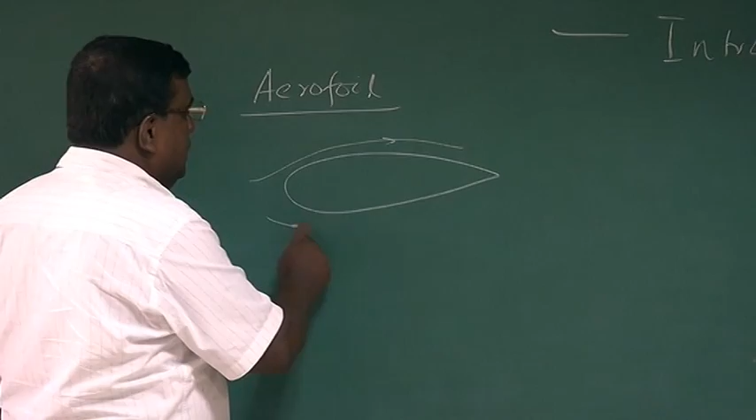If this is the aerofoil, then the contour of the wing and the flow over the wing will be decided by this contour, and there won't be any lateral flow or cross flows, right?

In that we define something called streamline. We didn't define streamline properly before; we want to define it in a more explicit manner now, but without going too much into the details. What actually happens?

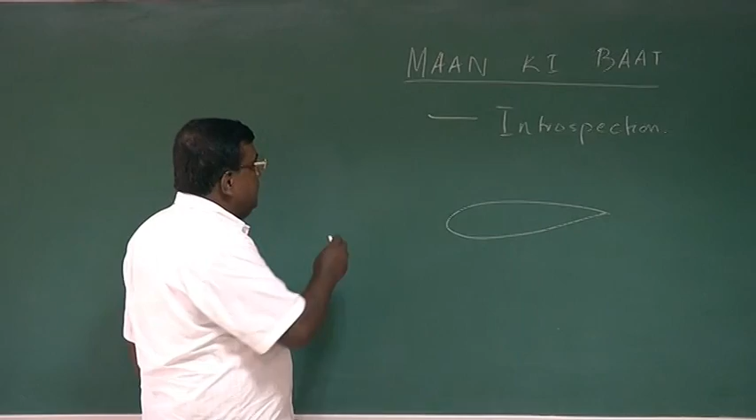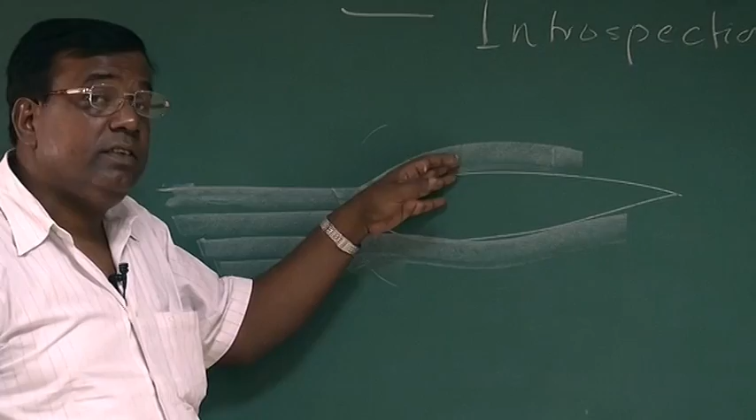Suppose the fluid flow is coming like this. What happens here? Some fluid will go like this, some will go like that. This flow over both these surfaces will decide what is the pressure difference.

Now the question comes, why at all should there be a pressure difference? This question we need to ask. We need to understand a little more, and we will be addressing that part.

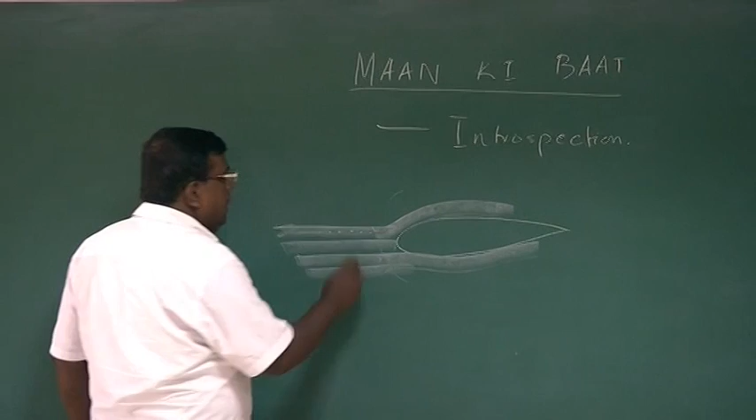First, if I want to represent this flow, which direction the flow is going, one of the ways is to define streamline. What is a streamline? You imagine points in this flow, and if I draw a tangent at this point, that gives me the direction of the flow. So this becomes your streamline, and this is another streamline. Any point you pick, draw a tangent, that gives the direction of the flow.

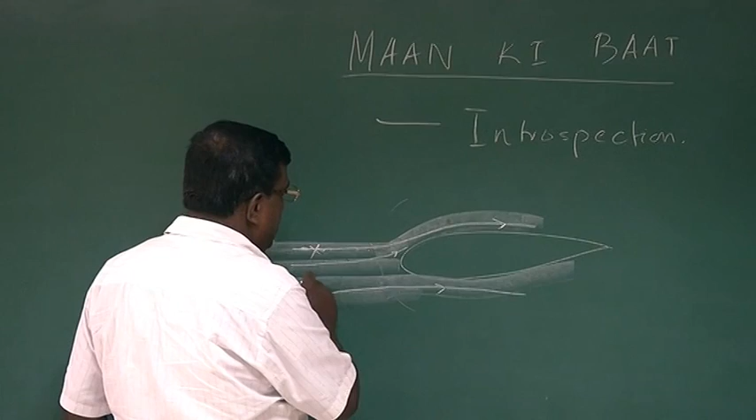It helps in visualizing, it helps in modeling. So many streamlines will be going like this. Infinite streamlines I can draw, because these are fictitious lines. This only helps to understand and represent the direction of flow, nothing more than that.

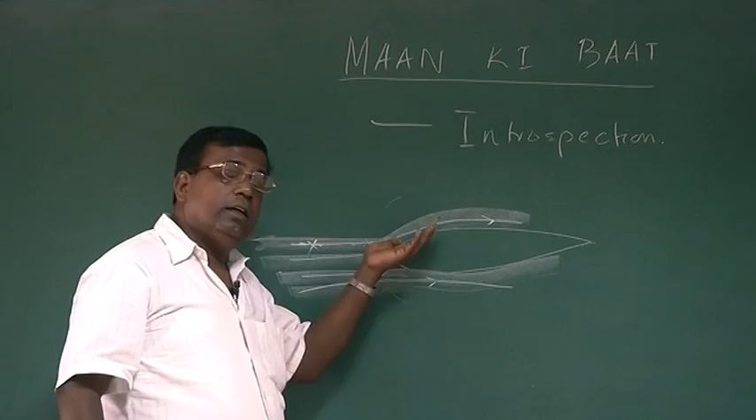However, this concept is what aerodynamicists have used in developing an analytical model to understand the forces, how the forces are acting, and what will be the force behavior with the orientation of the aerofoil, etc.

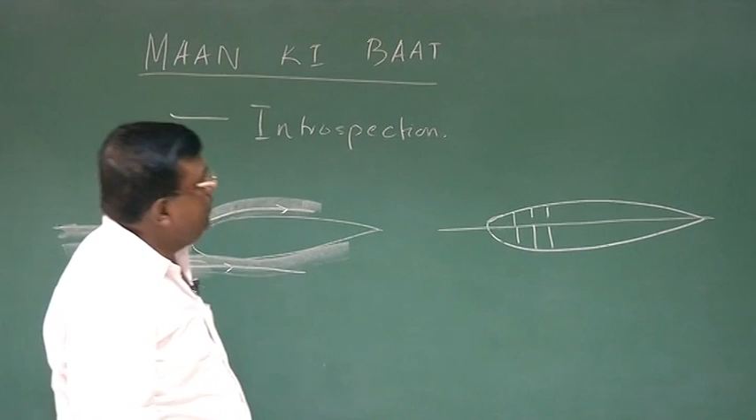Forgetting about streamlines for now, if I draw a symmetric aerofoil, symmetric meaning the distances from the chord line are the same on both sides. Though it isn't drawn properly, I hope you understand by now what a symmetric aerofoil is.

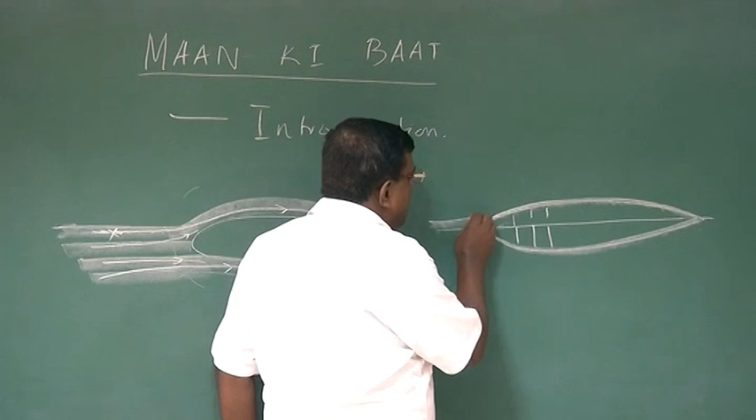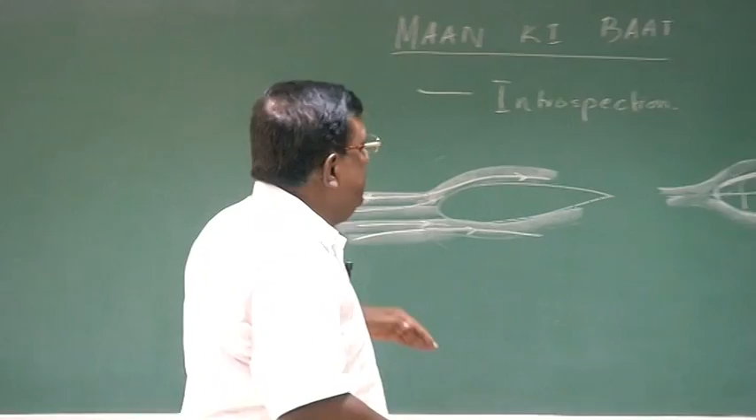What will happen? Without going into aerodynamics or anything specialized, by natural justice you will find half of the flow will go this way and half will go that way, because over a particular line, flow on one side will have a direction like this, and the other part will flow like that. So there will be another line where there won't be any flow in that direction. This part separates the upper and lower flow. I am not using any aerodynamic term here.

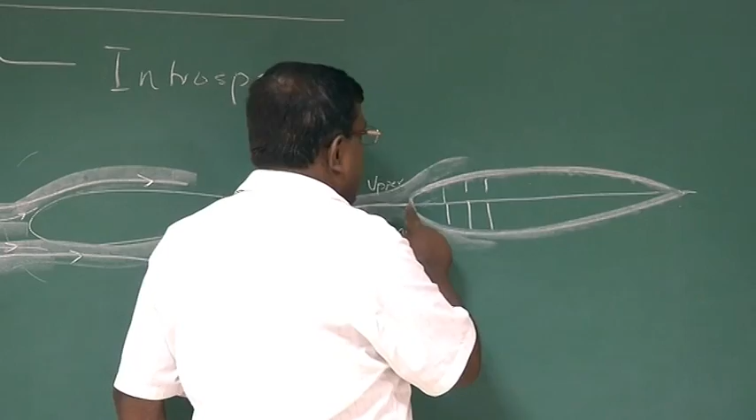So now see one thing. If it is a symmetric aerofoil, that means from here to here and from here to here, if I measure their length, they will be the same.

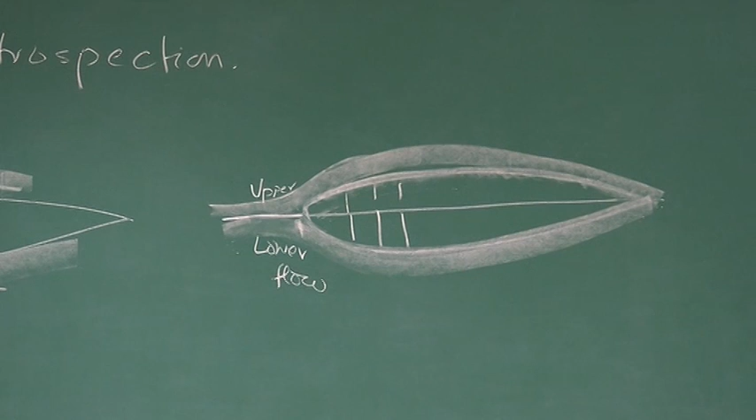That means the flow over this, if it remains attached, will travel from here to here, and flow here will travel from here to here, traveling equal distance. And there is another natural law, that whatever fluid is coming here has to come out. They cannot get stagnated or accumulated at one point, which we call the continuity of fluid particle motion.

That is, if we try to draw a pipe and allow fluid to flow through it, I know that whatever is going in here has to come out.

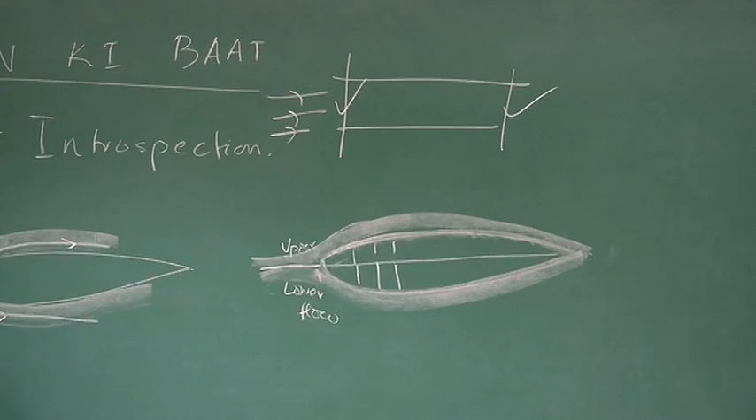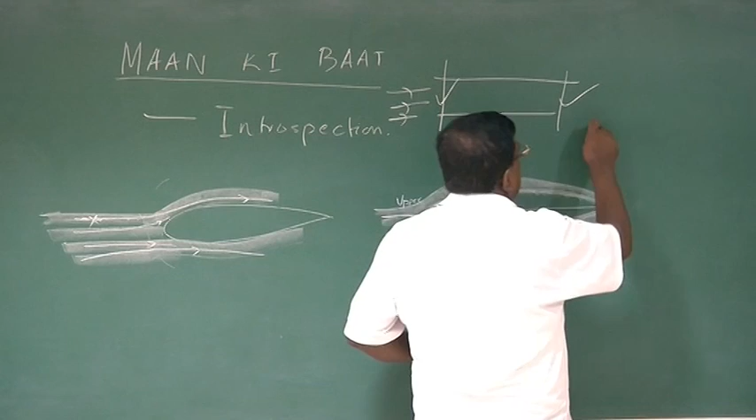If that is true, that means if they are traveling equal distance, upper portion as well as lower portion, they will have the same average velocity. And if the average velocity is the same, that means the pressure here and pressure lower has to be the same, because P plus half rho v square has to be constant, that is Bernoulli's theorem.

And since both are having the same average velocity, the pressure remains the same, so pressure upper and pressure lower will be the same, and hence there won't be any lift. This is one of the explanations.

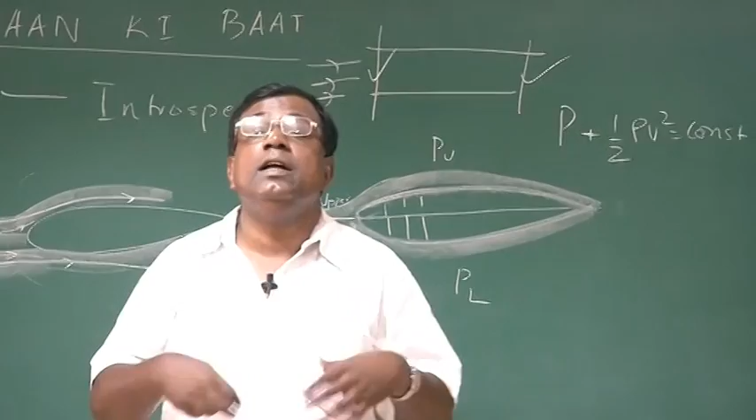There are many explanations, and they are designed and formulated to suit mathematical modeling. You'll see there are many ways of defining this other than what I am explaining here. This is using very fundamental common sense.

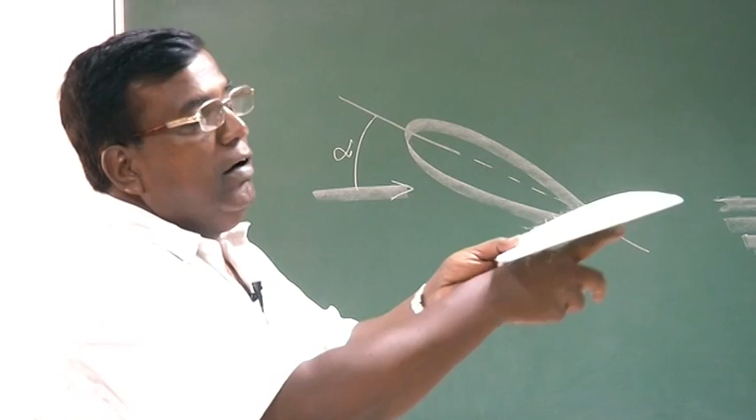Now think of this same symmetric aerofoil at an angle of attack, alpha. Now the question comes, what is angle of attack? To understand, revisit: if this is the plate, and this is the velocity direction, concentrating on the vertical plane, the angle between this velocity vector and the chord of the wing is called the angle of attack.

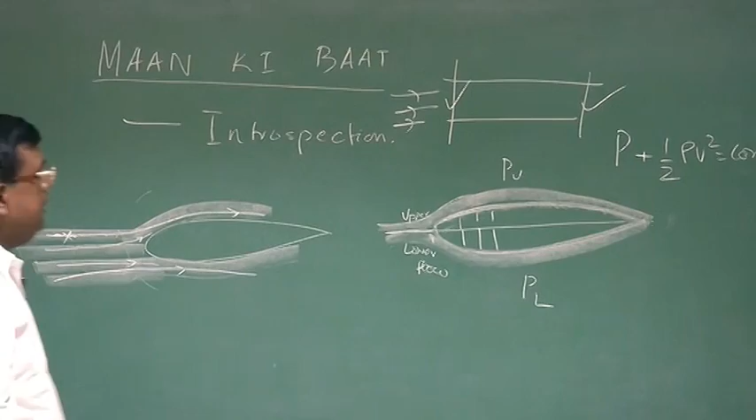Now what happens if I visualize like this? You could see some flow will go like this and some flow will go like this. What is the difference between this picture and the earlier one? You could see that the upper part of this fluid will be traveling more distance than the lower fluid. This is going like this, so it will traverse a larger distance than that fluid particle.

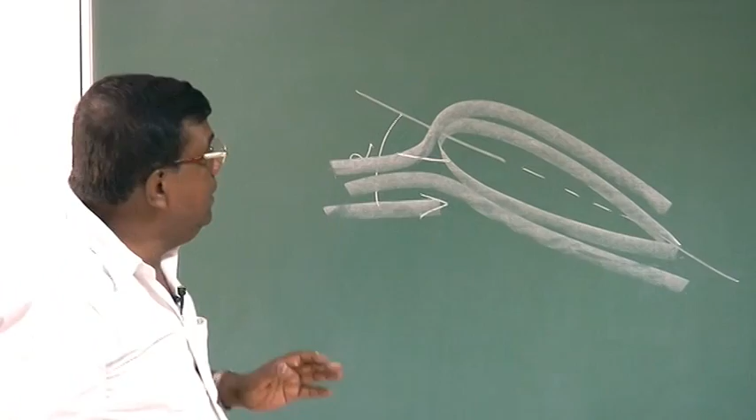However, because of continuity, whatever has entered here has to come out at the same time, that is, all the fluid particles will come out at the same time. That also tells us, since this one has to travel a larger distance, the average velocity here has to be greater than the average velocity lower, or I call it upper.

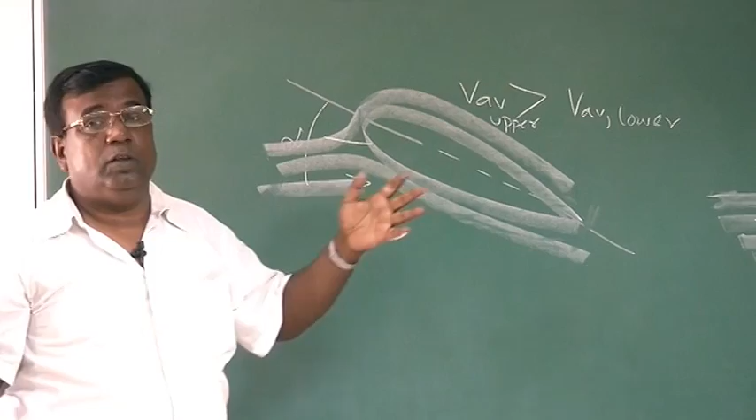Is this clear? If it is at angle of attack, this fluid stream has to traverse a larger distance compared to the lower part of the fluid. However, all the fluid has to come out at the same time. That means the upper part has to hurry up because of the larger distance. As it hurries up, the average velocity of the top surface will be higher compared to the lower surface.

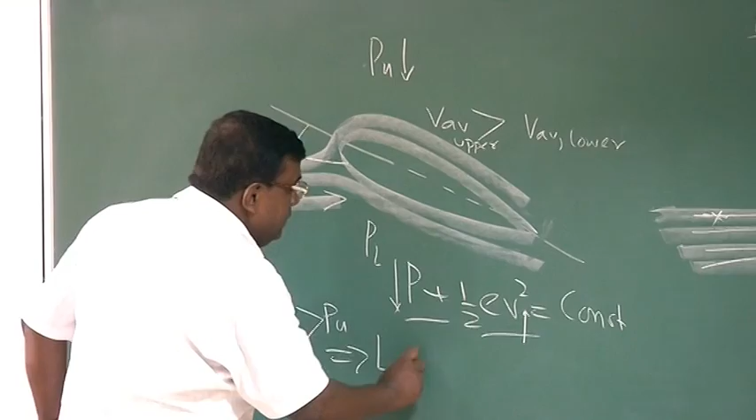And if the upper part speed is higher, and we know P plus half rho v square is constant, that is Bernoulli's theorem, if this term is higher, then the other term has to go down. That is why the pressure upper reduces compared to pressure lower, or pressure lower is greater than pressure upper, so there is lift. Is this clear?

I have purposely avoided technical terms which an aerodynamicist would use. They will define something called the stagnation point, but I am not using those things here.

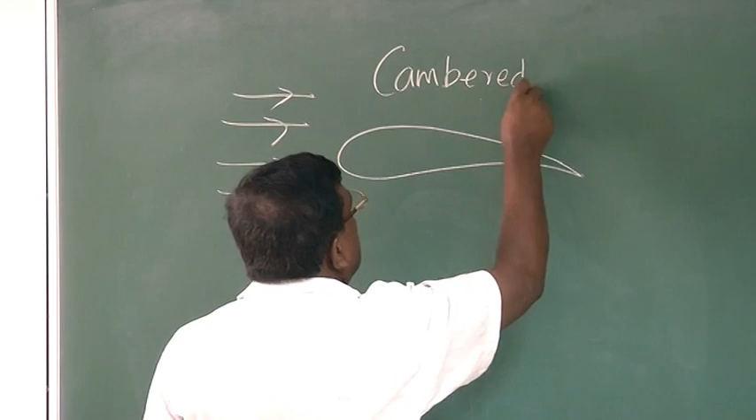Then we were discussing cambered aerofoil, where that symmetry has been broken. Now, from this geometry, if the flow is coming like this, the upper part has to have higher speed compared to the lower part. The same theory applies here, and we will have a pressure difference and lift.

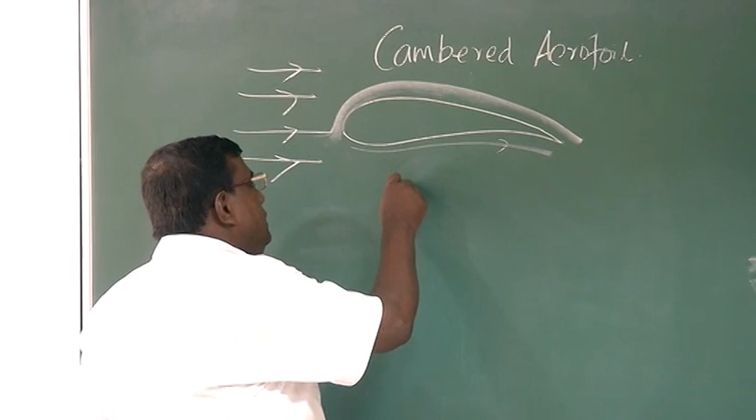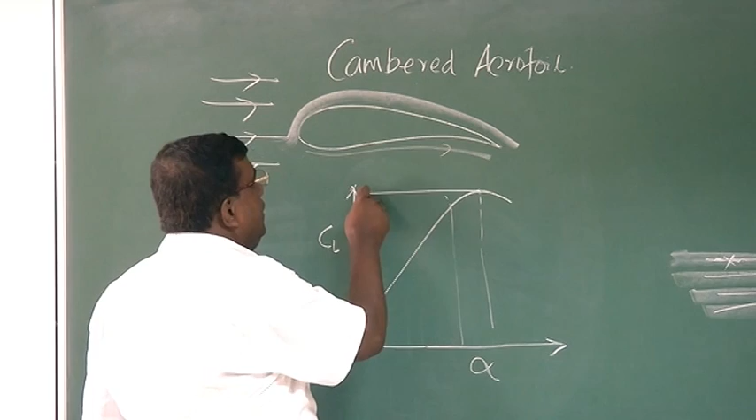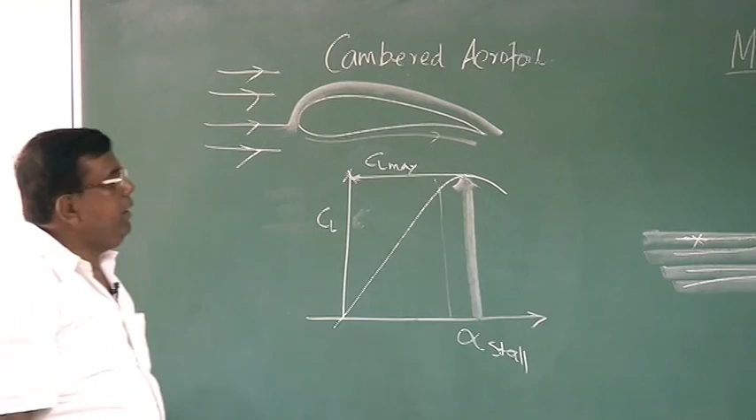We also realize that if I plot CL versus alpha for a cambered aerofoil, up to a certain point it is linear, and after that we reach what we call CL max, the maximum CL this wing or aerofoil can generate. After that there is a drop in CL and an increase in drag, and that region we call stall. Conventionally, we call the angle at which the flow separates alpha stall. So these two important terms: at alpha stall, CL is CL maximum, meaning if you further increase the angle of attack beyond alpha stall, you will not get additional CL—in fact, CL will reduce.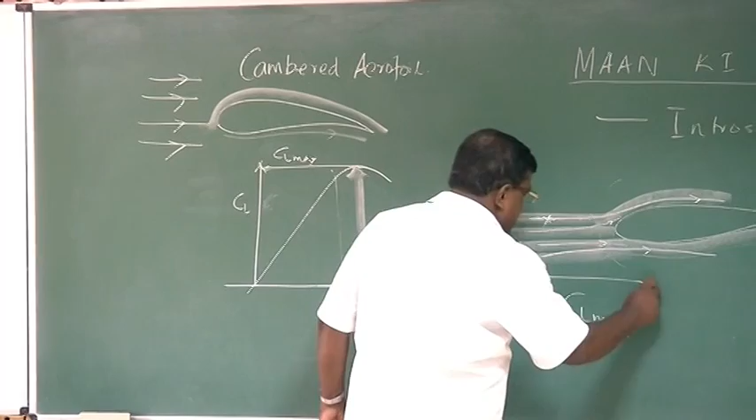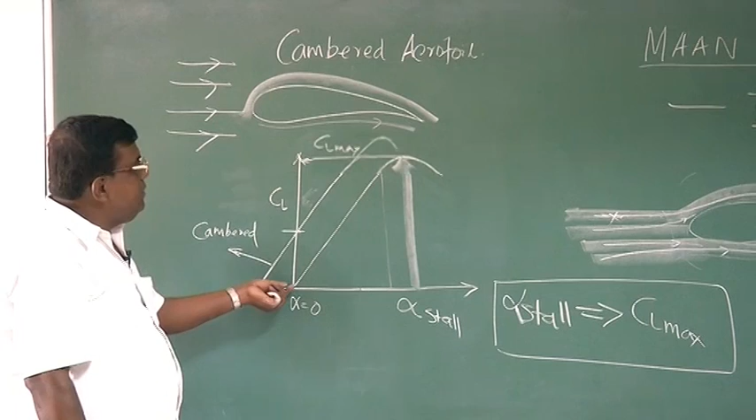This is additional understanding we should have. For a cambered aerofoil, you'll find this graph is no longer like the symmetric one. It looks like this, where I write cambered. At alpha equal to 0, for the symmetric case CL was 0, but for cambered there is a positive value, which is denoted CL naught. And if I extrapolate this curve, I find the alpha for CL equal to 0 is negative.

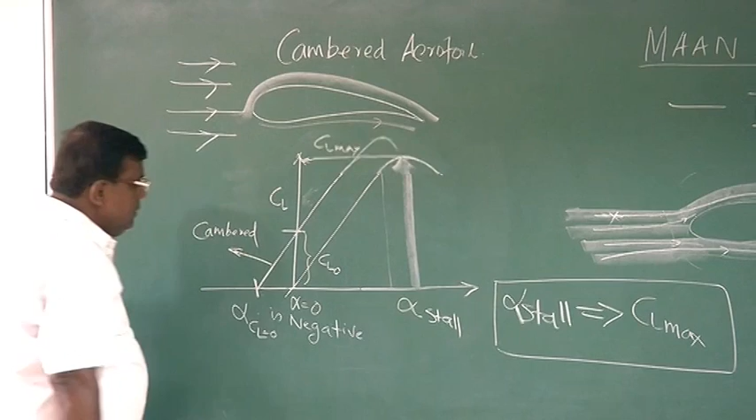You could see here, if I am flying at this alpha, then the CL is 0 and this alpha is negative, right? This is very important. It is also denoted as alpha zero L. Many textbooks you will find like that.

For a cambered aerofoil, I get larger CL at smaller geometric angle of attack, but at the cost of what? The alpha stall reduces. So although we are getting more CL, the alpha stall will reduce. If this is a cambered aerofoil and this is alpha for CL equal to 0, which is negative...

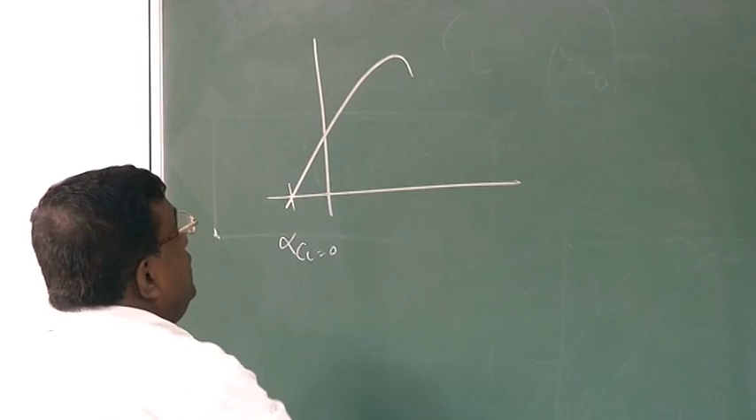If I draw a cambered aerofoil, I know there is a zero lift line, that is called the zero lift line. That means if the flow comes like this, at a negative angle of attack, corresponding to this alpha CL, then there won't be any CL generated by the cambered aerofoil.

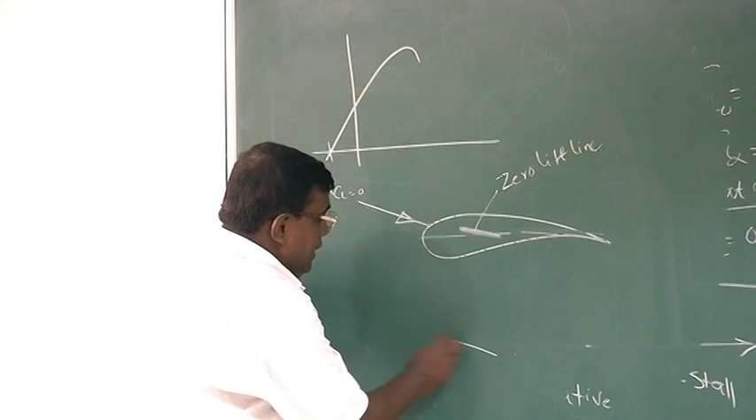In flight mechanics, we use this concept more frequently when discussing stability and control. I repeat, this is a negative angle of attack, because positive angle of attack is when the flow is coming like this. When I draw like this, it's relative here — the airplane is actually going like this. But negative will be in the reverse direction, that is why this is negative angle of attack.

So this was what we discussed, or we create a foundation. I'm trying to add a little more insight into it so that our next lectures become very smooth. After this, from aerofoil, then we try to talk about wing, and we talk about finite wing.

Talk about finite wing, and we realize finite wing means this span is not infinite, it is finite. So at the tip of the wing, because there is a pressure difference in the bottom and the top, there will be vortices, and they will draw kinetic energy, rotational kinetic energy, at the cost of the machine's energy. So there is a drag, and we call it vortex drag.

So if I draw it like this, something like this, this is vortex drag. It is also called lift induced drag, or sometimes simply induced drag.

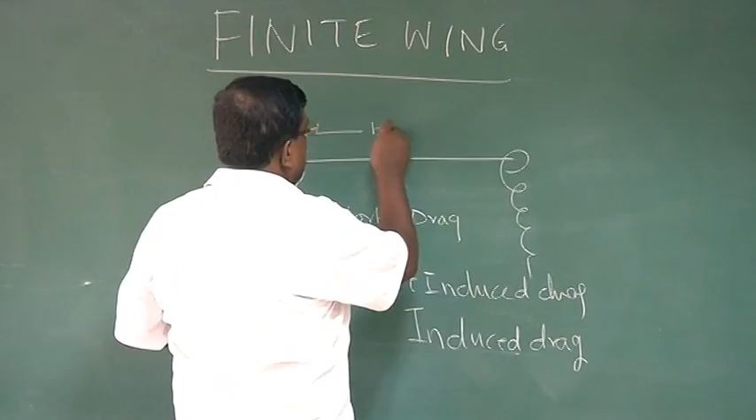And we realize that if this span, which is B, becomes infinity, then this vortex drag will not be there, because there won't be any physical pressure difference. So the vortex drag or induced drag will be 0, and that is like you are approaching towards an aerofoil, which is two-dimensional.

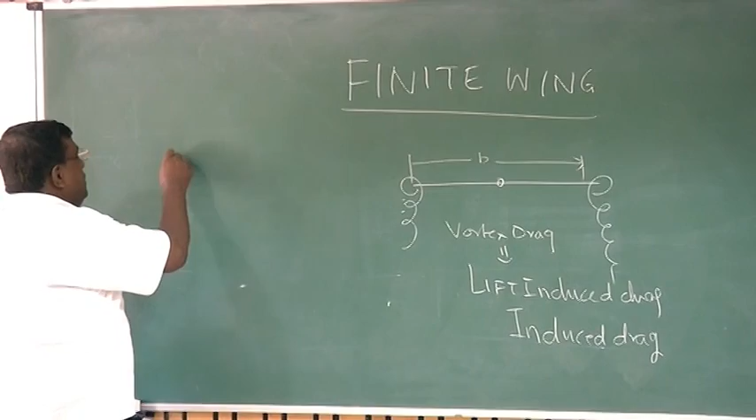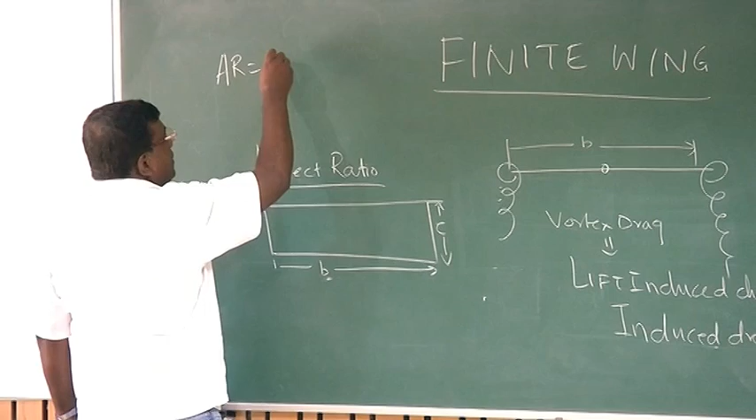And there we define something called aspect ratio. We define aspect ratio as, if this is the span, and if this is the chord, then aspect ratio was defined as B square by area of wing. That is the aspect ratio of the wing. If I want to calculate aspect ratio of the tail, then tail span square by area of the tail. For a rectangular wing, it becomes B by C.

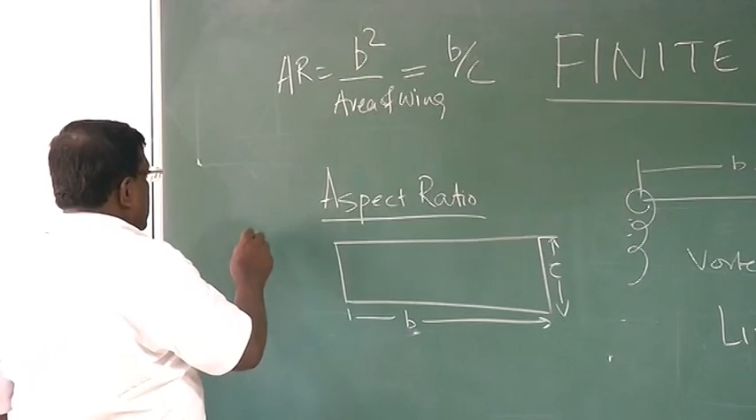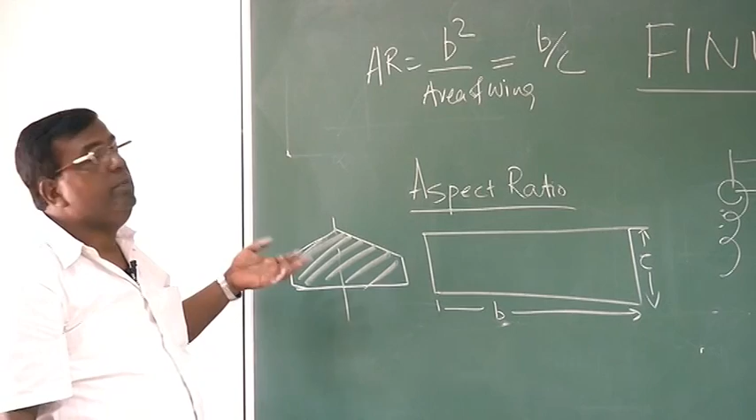However, if the wing is something like this, then actually you have to find out the area of the wing, which will be here, and span square divided by area of the wing will become your aspect ratio. Then it will not be B by C, because C is changing — chord at every point is changing.

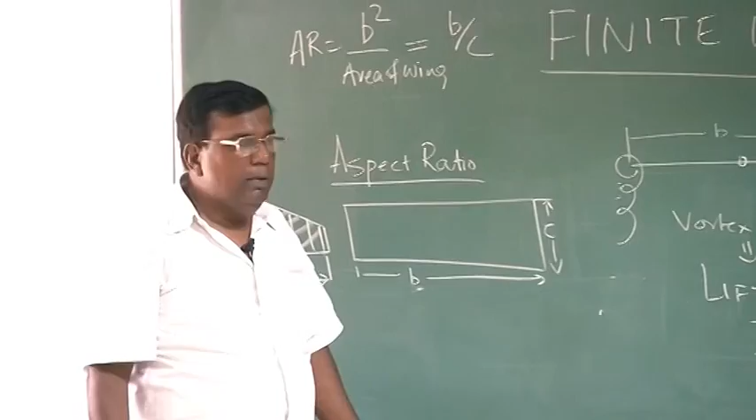While discussing induced drag, we very lightly mentioned something about lift distribution. We talked about elliptic lift distribution where the induced drag will be minimum, and the lift distribution was typically something like this, where there are no pressure differences at the tip.

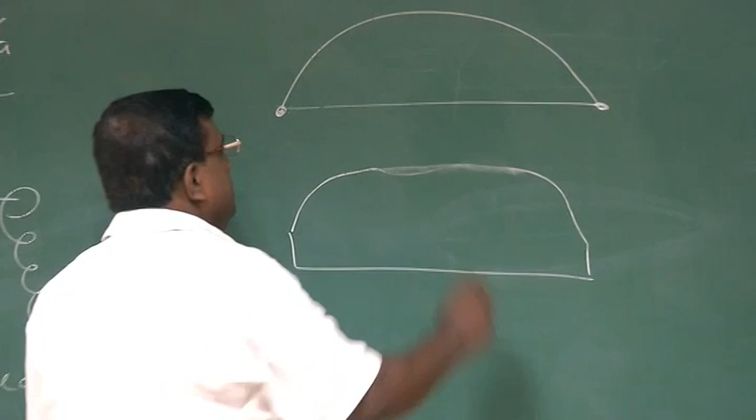But in actual practice, what will happen, it may be something like this — the best way, of course, I should not draw it like this, but it may change. It will not be elliptical. The best way to approach towards elliptical distribution is that you give the wing this sort of configuration where...

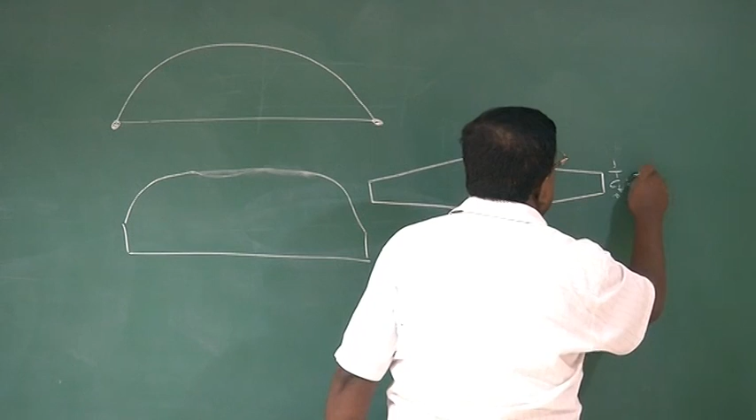I call this as CT, which is the tip chord, and this I define as CR, which is the root chord, and I define taper ratio as CT by CR. If I keep this value 0.4 to 0.5, for all practical purposes, I am approaching towards elliptic distribution — not elliptic, but yes, towards elliptic distribution.

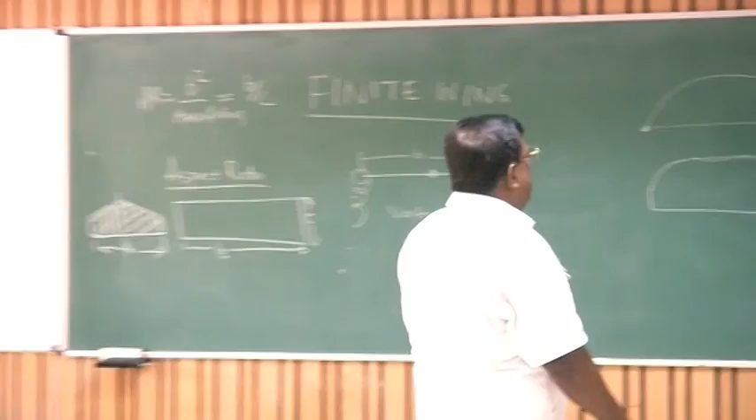You could see that we are making the area less here, so we are discouraging lift at the tip. But let us come back here. As a designer, I would like to reduce this effect. So what do I do? One of the most popular ways of doing it is...

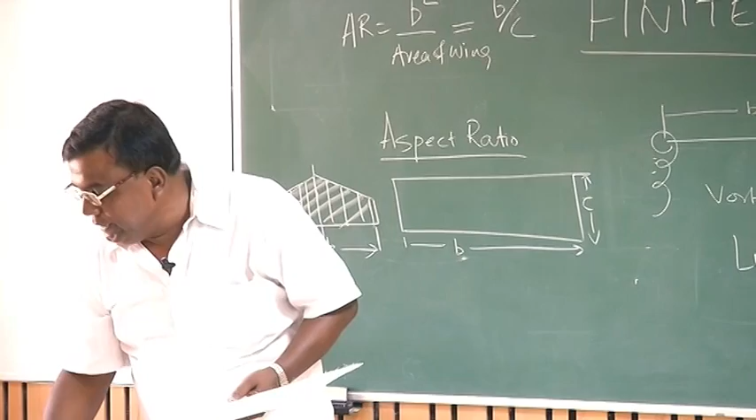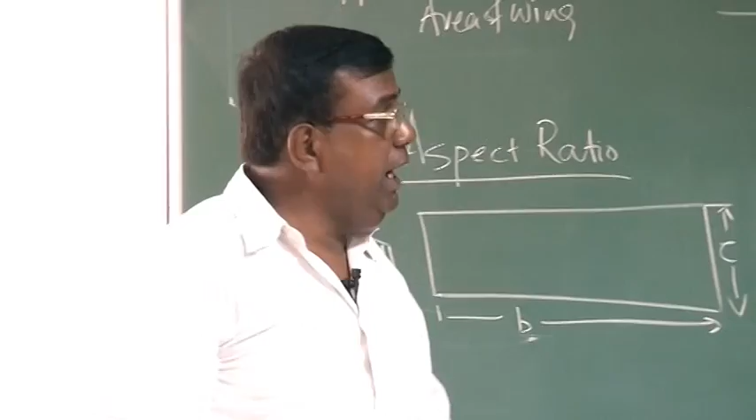We know that because of the physical pressure difference between the bottom and top surface, there is a flow like this. So what do we do? We discourage them from coming from bottom to top, and this is the basic concept behind winglets. You'll find many airplanes have winglets — you put some surface here. There are many variants of design for winglets, but the concept is, by putting this, you are physically separating these two portions, bottom and top, so that there are fewer vortices. So winglets is the concept that is used.

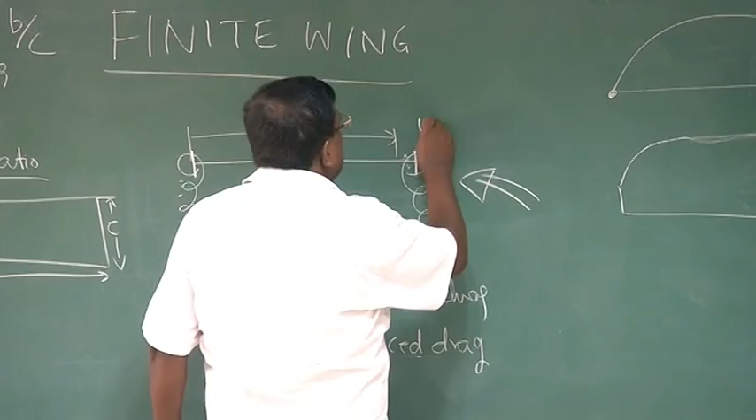There are many other concepts that are used. You can put an aerofoil at the tip which is not that lift-effective, or you can destroy that contour so that you're destroying the lift generation at that point. That way the pressure difference at that point will be less, so you are expected to get less vortex drag, or induced drag.

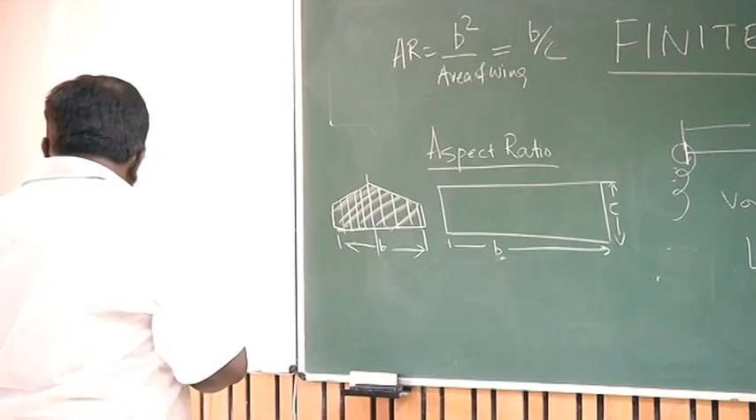Okay, this is another thing on aspect ratio, how I was sharing with you, how I understood it. If you see George Cayley's explanation, you need the angle between the surface and the velocity vector, and definitely there's area. So I was asking the question, if I put this, both are having the same area. So how do we distinguish this?

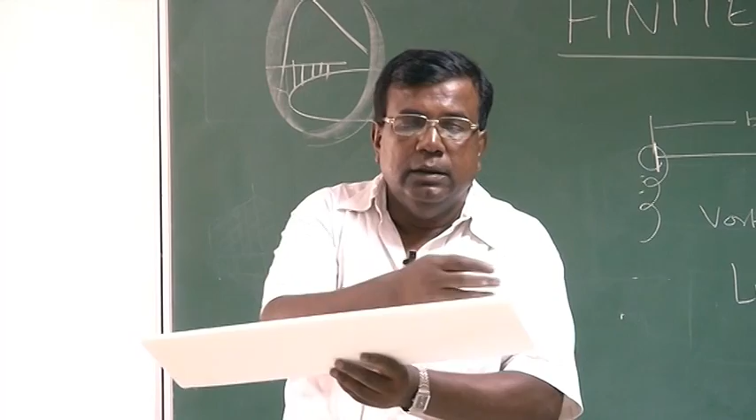Now we know by now that I would like to put the wing like this, not like this. How I understand is, remember one thing, the whole lift distribution which comes because of the aerofoil, this is the region where I explained the flow accelerates and there's a drop in pressure. Mostly this portion is responsible for generating the lift in a dominant way. So if I put a wing like this, I can think it has a large number of aerofoils, but if I put it like this, then I have a smaller number of aerofoils. Anyway, because the top portion, front portion is going to contribute more towards lift, that is why aspect ratio should be clearly understood along with its importance.

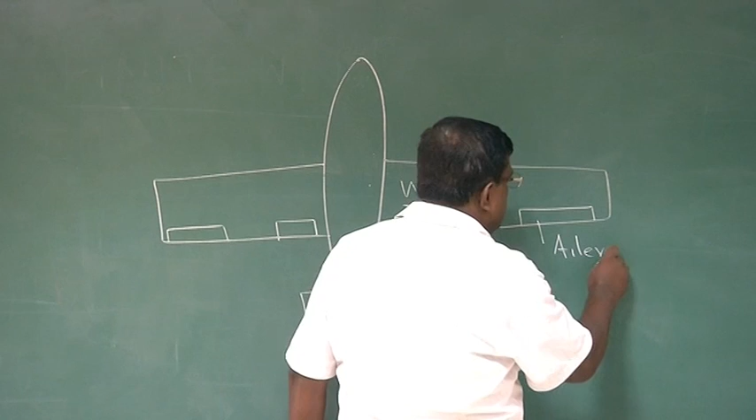And we by now know this is the aileron. These are flaps. In fact, all these components are flaps only; it is for a specific purpose that we give a name to this portion as aileron. The role of the aileron is this: suppose this is the wing, and I put this aileron down and this aileron up. What will happen? The moment I put the aileron down, this wing's camber will increase, so its lift will increase, and this one will go down, so it will turn like this. So a pair of ailerons is used for banking the airplane. So aileron is for banking, or sometimes it is also referred to as roll.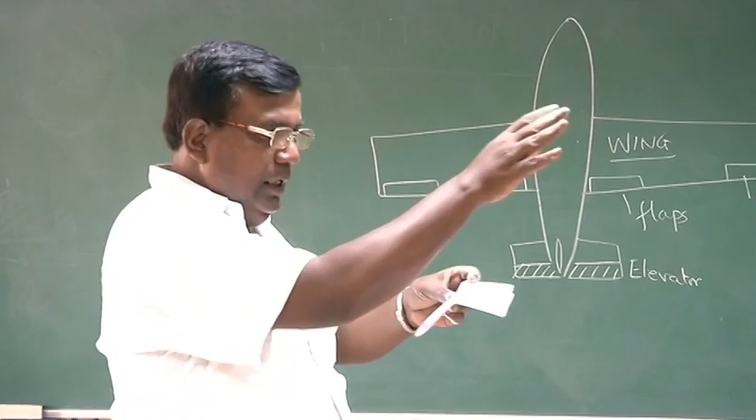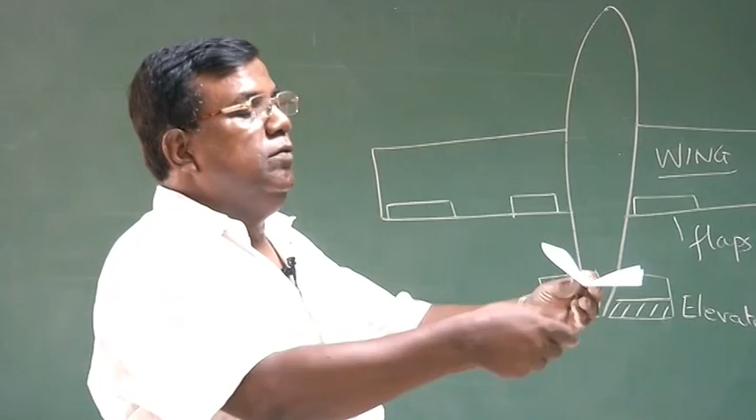In contrast, if I put the elevator up, the force will be downward, so the nose of the airplane will go up; we say the airplane will go nose up. So to take the airplane's attitude up, I will put the elevator up. To take the nose of the airplane down, I will put the elevator down. If I want to take it nose up, I put the elevator up, force downward, so it goes up like this. If I want to take the aircraft down, I put the elevator down, giving a force upward, and with the CG in front, that takes it down. So that is the primary role of the elevator.

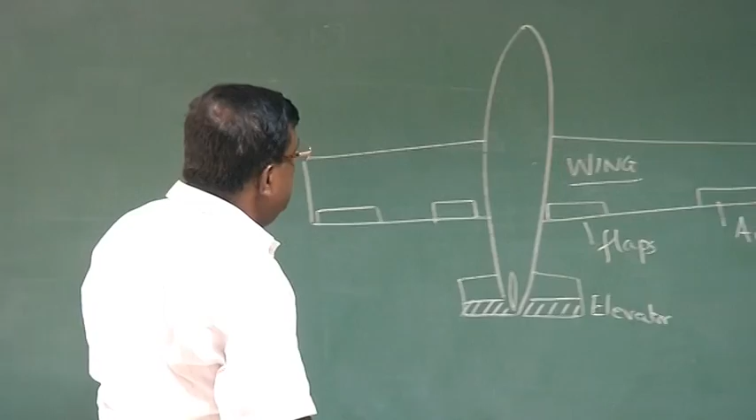Then we have the rudder. Think of it like this: suppose this is the vertical surface, this is the aerofoil, the vertical surface, and I am going in this direction. Now if I put this rudder towards my right, flying like this, I have deflected it towards right. What will happen? If I deflect towards right, it will experience a force in this direction, which gives a yawing moment that takes the airplane towards right. That is, if I put the rudder towards right, the airplane will also go towards right, like this. If I put it the other way, towards left, the airplane will go towards left. So that is the function of the rudder.

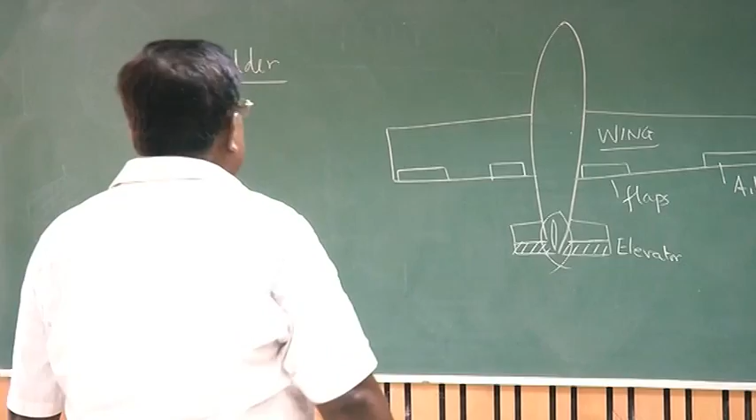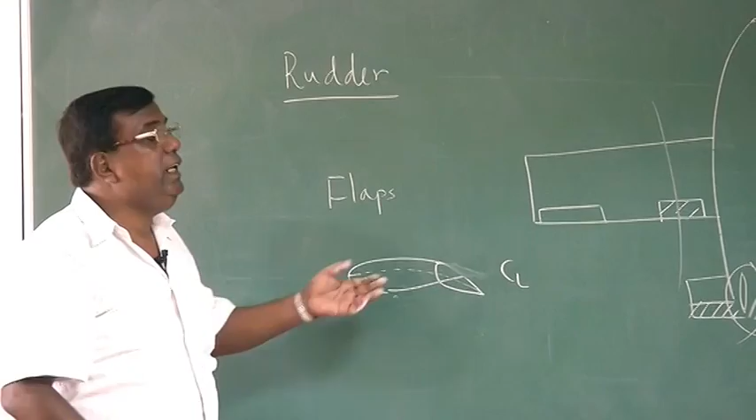Then comes the flaps. If I take a cross section here, it also has an aerofoil, and this is the flap, let's say I am drawing here. As I put the flap down, what happens? The whole camber of this section has increased, so the CL for a given angle of attack will increase. So this is the way to increase CL max. We will see, when we talk about landing and takeoff, how to increase CL max so that I can take off at a lower speed. So this is the role of the flap.

If I understand all this clearly, I will be able to synthesize all these things through the requirement of an airplane for a specific performance. That is why it's important to know.

The next lecture will be on the atmosphere. Why is it important? Because whatever lift and drag we are getting comes at the cost of interaction of the airplane, a body, with a medium. So far we have been talking about the configuration of the body: aerofoil, wings, flap, fuselage, tail, elevators, etc. But since it is because of interaction of the body and the medium, we need to know the property of the medium also. So the next lecture will be on atmosphere, or more precisely, standard atmosphere.

Why is this the requirement? See, if you have purchased a motorcycle and somebody asks what average fuel mileage you are getting, you say the company told you 50 per liter, but you are getting 35 or 40 per liter. Then the company will simply say the road, or the traffic, or where you are driving this motorcycle is not an ideal condition. It will indeed give 50 km per liter if you are running on a highway with no traffic jam, where you can maintain a speed. So what they are telling is, when comparing motorcycle performance, I need to know that the platform where I am driving should be well defined.

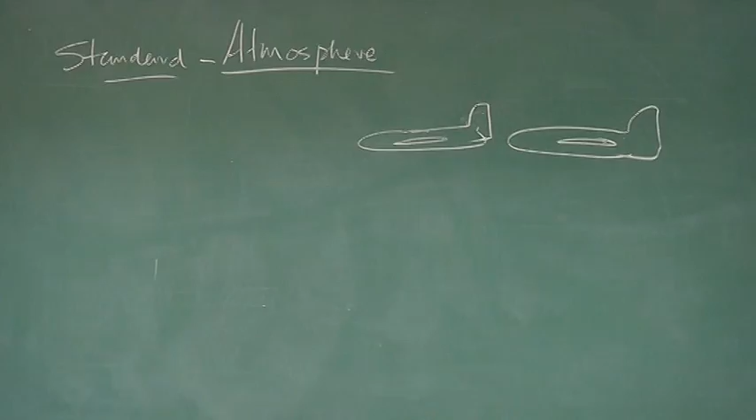Similarly for aircraft, if I want to compare performance of two airplanes, then I need to compute and evaluate their performance characteristics when they are flying at a common or same atmospheric environment. And that is where this concept of standard atmosphere came into picture.

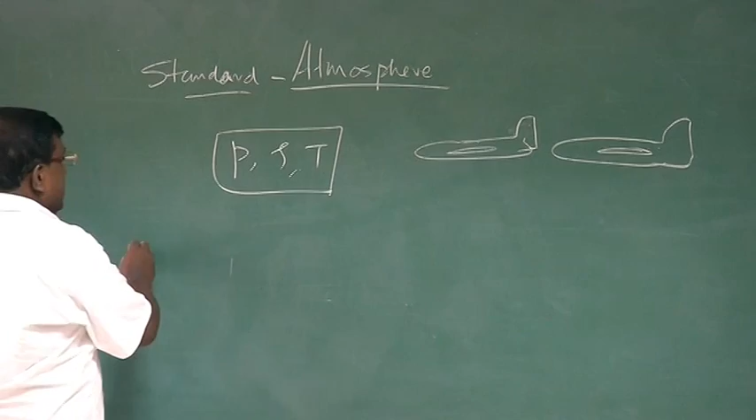We will try to develop methodology, already established based on experimental results, with an assumption that air behaves like a perfect gas. That is, we will assume P equal to rho RT is valid, and we will try to give a description of pressure, density and temperature as we go higher and higher. The approach will be: I will know the condition at sea level, and as I go up, how the pressure is changing, how the density is changing, how the temperature profile with altitude is measured experimentally. We'll use this to give a description of pressure, density and temperature.

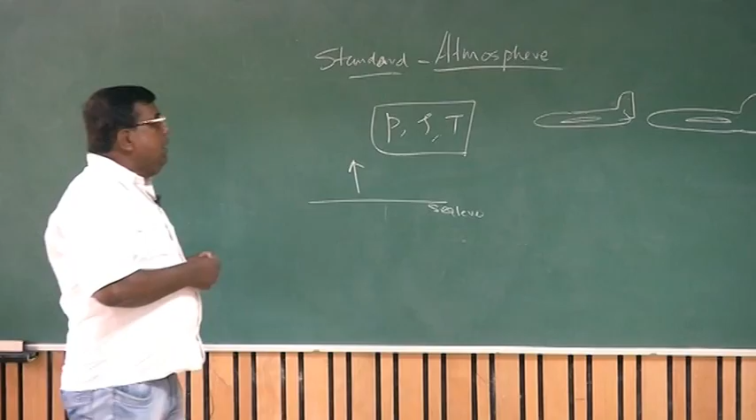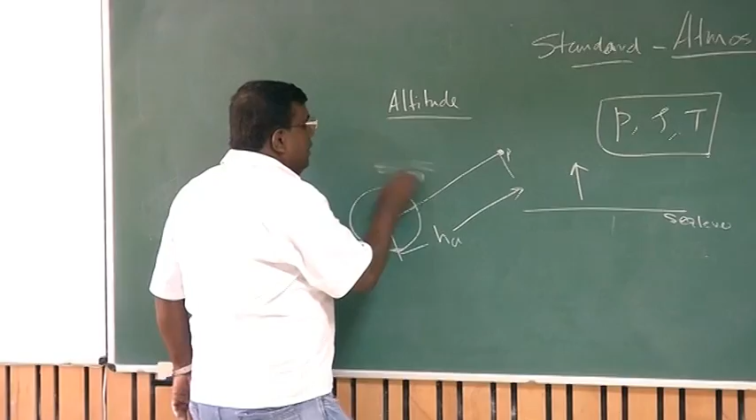Also, when trying to find the pressure change as we go higher, we need to know a few things about altitude. If this is Earth, this is Earth's center, and the radius of Earth, then at any point P, if I define the distance with respect to the center, let's call it HA, traditionally called absolute altitude. This has more relevance in space flight, because in interplanetary motion the value of G changes drastically. But when talking about atmosphere, I'll be talking about atmosphere present within a definite altitude measured from sea level. There is no atmosphere beyond a certain point.

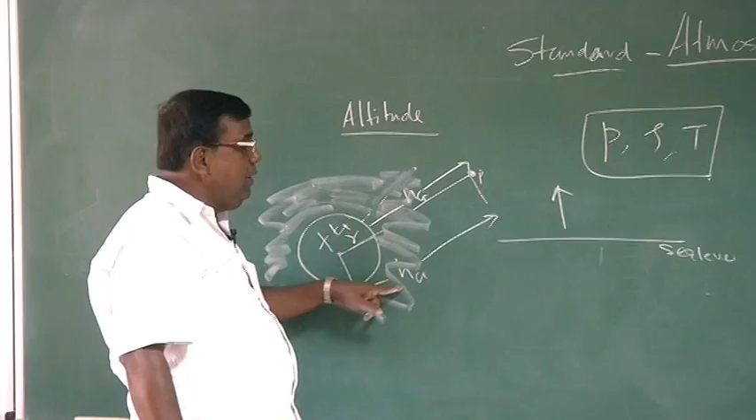So if I use this altitude, I'll be doing wrong modeling. That is why another altitude is defined, Hg, measured from the surface of the Earth, or more precisely from the sea level condition. We'll use this concept, and we'll see that around 60 kilometers altitude, Hg and a new height will require defining, a new height we'll call fictitious height or geopotential height, because as we go higher and higher, the pressure is because of the weight of the fluid.

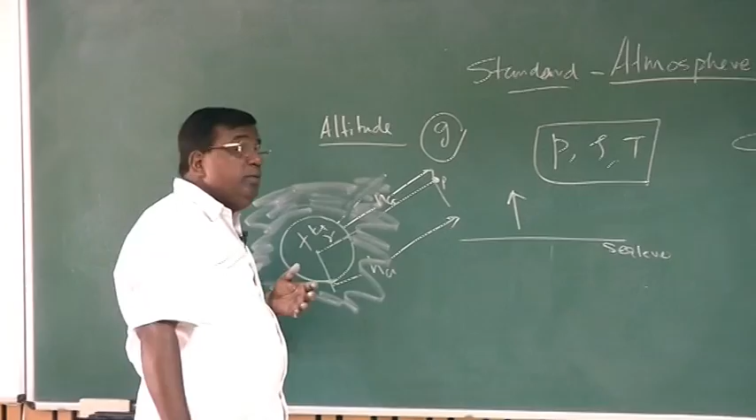And how will we be computing pressure? We know the pressure at sea level, and as we go higher, we try to find the change in pressure, that is dP, which is negative. So change in pressure has relation with the weight of the fluid, and weight means local value of G, which changes with height measured from the center of the Earth. So there is a complication.

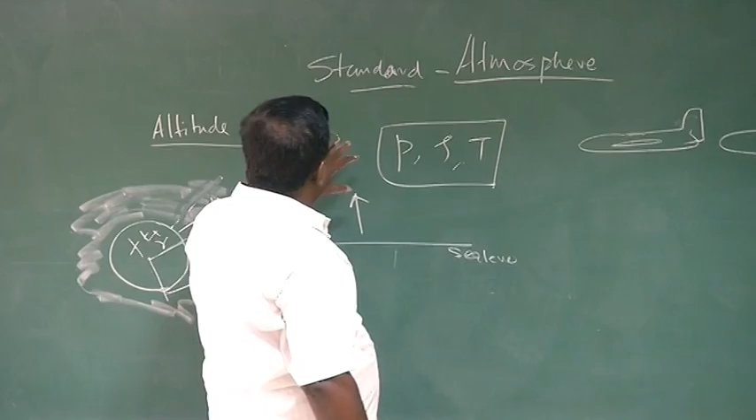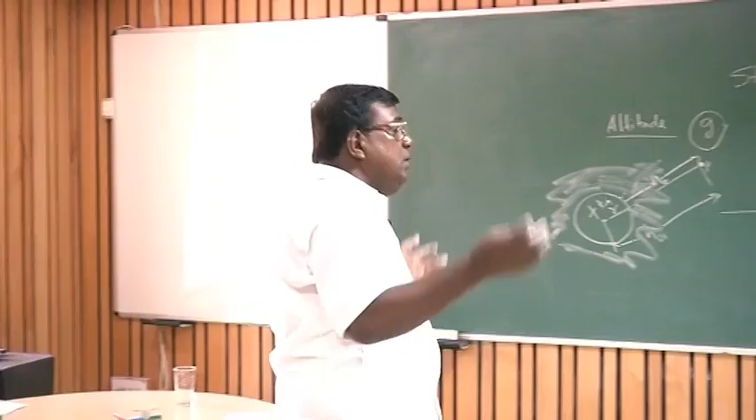Some simplifications will be made as long as we are within 60 kilometers. This is what is required to describe pressure, density, and temperature in what we call standard atmosphere, and we will also define the standard atmosphere initial conditions, that is, at sea level, the standard values of density, temperature, and pressure. Then through a table, I can know the standard value of pressure, density, and temperature at any altitude, which will be used to compute the performance of different airplanes, or to compare performance with flight test results.

So the next lecture will be on standard atmosphere.